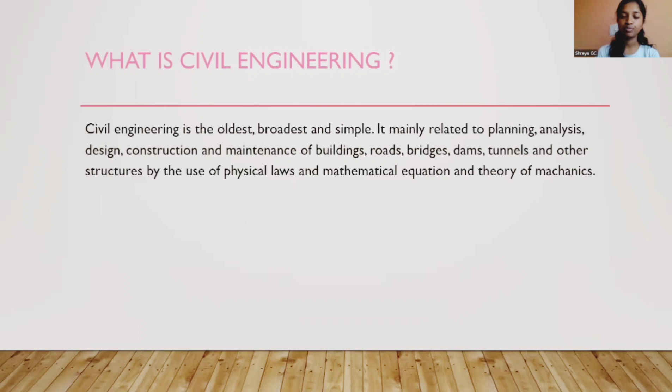Now we'll discuss the scope of civil engineering. It contains 9 elements: surveying, structural engineering, geotechnical engineering, hydraulics and water resource, transport engineering, environmental engineering, construction planning and project management, earthquake engineering, and remote sensing and GIS.

So firstly, what is surveying? It is a science or art of map making. It mainly deals with various types of measurements and plotting of maps. Unless maps are drawn, no development work or construction can be undertaken. Earlier, traditional instruments used for surveying were chain, tape, leveling instruments, etc. Modern instruments are distance meter, total station, theodolite, etc.

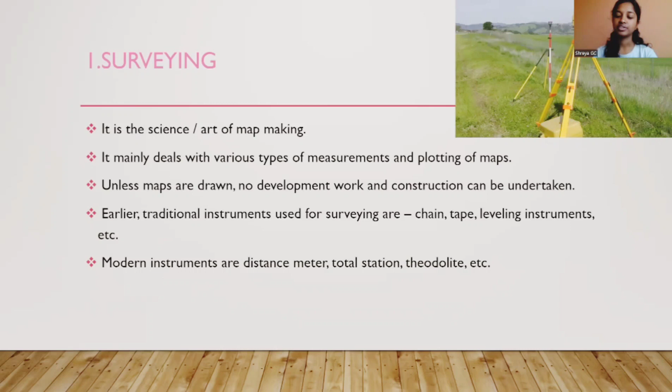The second scope of civil engineering is structural engineering. It mainly deals with analysis and design of various structures like steel structures, trusses in industrial buildings, towers, etc., and concrete structures like buildings, bridges, dams, etc.

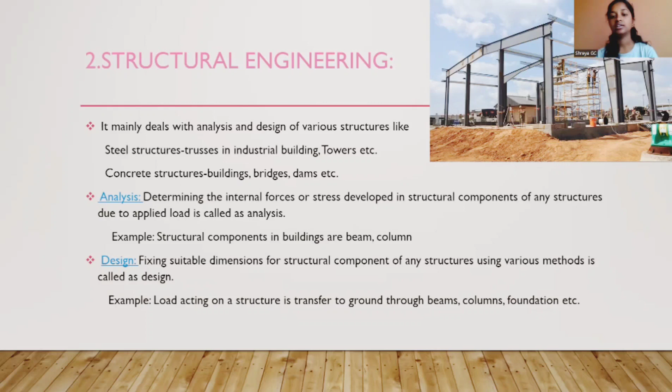Analysis is determining the internal force or stress developed in structural components of any structure due to applied load. Example: structural components in a building are beam and column. Design is fixing suitable dimensions for structural components of any structure using various methods. Example: load acting on a structure is transferred to ground through beam, column, foundation, etc. Later, I will discuss about beam, foundation, and column.

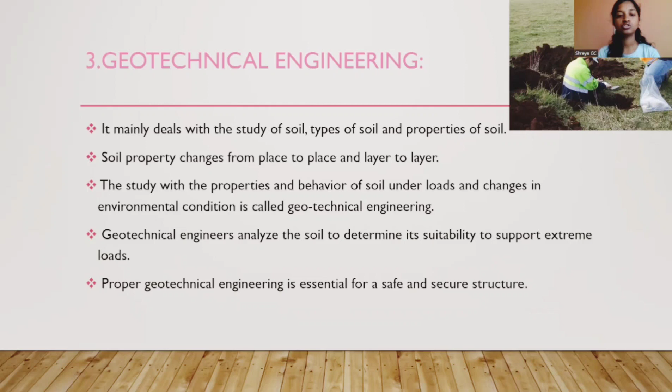The next one is geotechnical engineering. It mainly deals with the study of soil, types of soil, and properties of soil. Soil property changes from place to place, layer to layer. The study of properties and behavior of soil under loads or changes in environmental conditions is called geotechnical engineering. Geotechnical engineers analyze the soil to determine its suitability to support extreme loads. Proper geotechnical engineering is essential for a safe and secure structure.

The fourth scope of civil engineering is hydraulics and water resource. Hydraulics: as we know, water is a very important need for all human beings. It mainly deals with the study of mechanics of water and its characteristics like pipe flow, open channel flow, dams, irrigation, hydropower, etc.

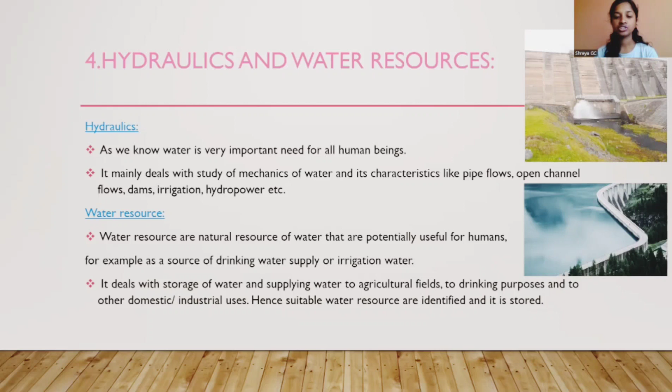Water resource: water resources are natural resources of water that are potentially useful for humans, for example as a source of drinking water supply or irrigation water. It deals with storage of water and supplying water to agricultural fields, for drinking purposes, and for other domestic or industrial uses. Hence, suitable water resources are identified and stored.

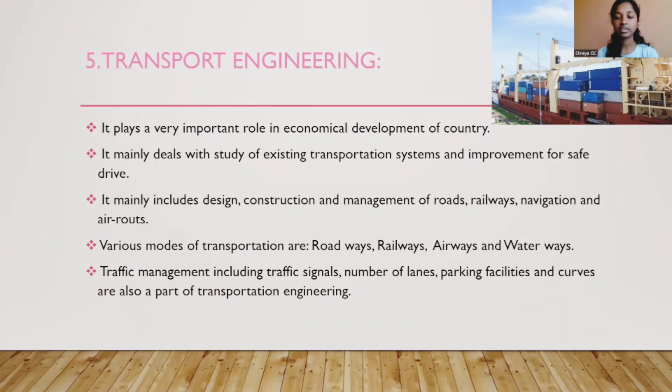The next one is transport engineering. It plays a very important role in the economic development of a country. It mainly relates to the study of the existing transport system and improvements for safe driving. It includes design, construction and management of roads, railways, navigation and air routes. Various modes of transportation are roadways, railways, airways, and waterways. Traffic management, including traffic signals, number of lanes, parking facilities, and curves, are also part of transportation engineering.

The sixth scope of civil engineering is environmental engineering. This is an important branch of civil engineering which covers both water supply and sanitary engineering. The main aim of environmental engineering is to keep the environment clean. It encompasses the treatment of waste originating from different sources. The impact of waste from industry is felt by living organisms if such waste contains toxic substances. The central government as well as state governments have enacted laws for protection of the environment needed for safe living of human beings.

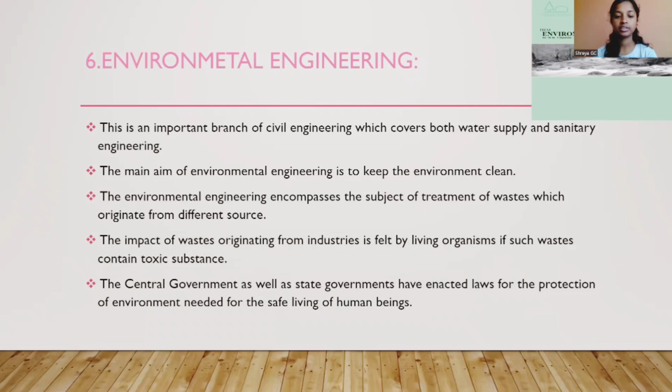The seventh scope of civil engineering is construction planning and project management. Construction planning deals with different types of construction of structures like buildings, roads, bridges, etc., construction of underground tunnels using modern equipment, and construction of floating structures. It mainly includes excavation of soil, construction of foundation, concreting, finishing, etc.

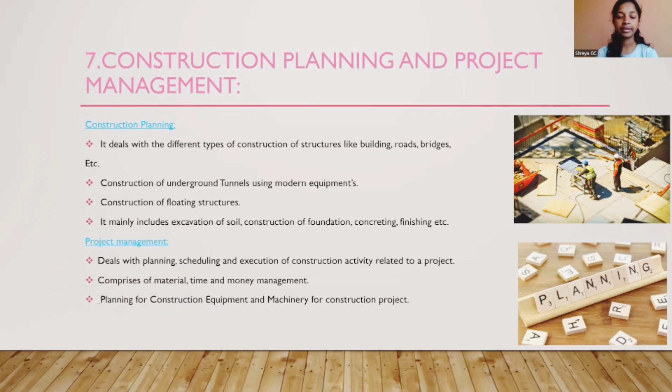Project management deals with planning, scheduling, and execution of construction activity related to a project. It comprises material, time, and money management, and planning for construction equipment and machinery for the construction project.

The eighth scope of civil engineering is earthquake engineering. An earthquake is a sudden and rapid shaking of the ground due to passage of vibration. The study of earthquakes is called seismology. Earthquakes with magnitude of about 2 or less, usually called micro earthquakes, are generally recorded only on local seismographs. Events with magnitude 4.5 or greater are strong enough to be recorded by sensitive seismographs all over the world. Great earthquakes have a magnitude of 8 or higher.

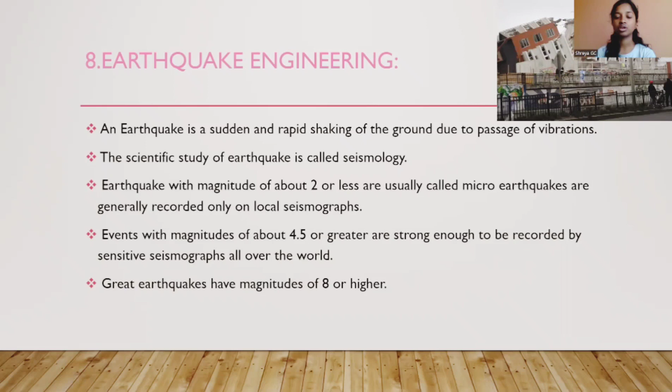The last scope of civil engineering is remote sensing and GIS. GIS and remote sensing techniques have become essential and powerful tools for tackling civil engineering problems. The majority of remote sensing systems use the sun's radiation. Remote sensing is the art and science of gathering information about items, events or areas without physically touching them. It deals with measurement, mapping, monitoring, and modeling of geographic information around us.

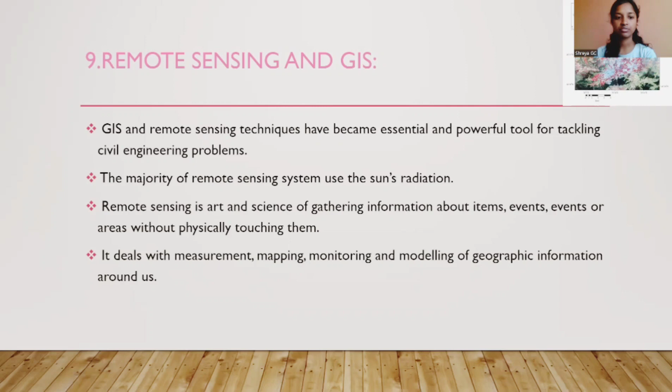Let's discuss the types of materials used in construction. These are bricks, cement, mortars, plain concrete, reinforced and pre-stressed concrete, structural steel, and construction chemicals.

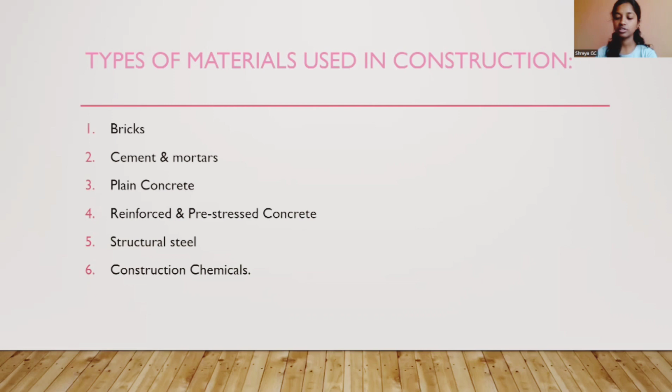So first one is brick. Bricks are obtained by molding clay in rectangular blocks of uniform size and then drying and burning these blocks. As bricks are of uniform size, they can be properly arranged, are light in weight, and hence bricks replace stones.

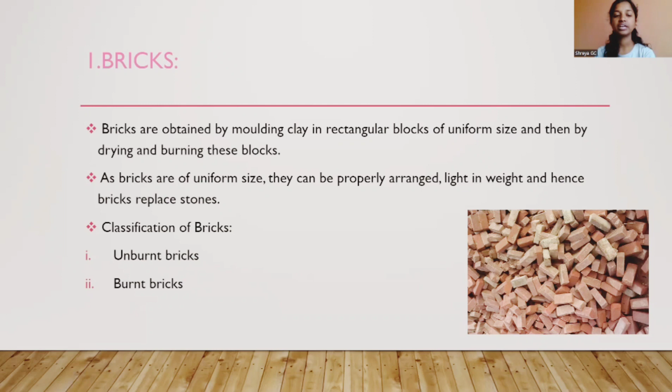Classification of bricks: unburnt bricks and burnt bricks. Unburnt bricks or sun-dried bricks are dried with the help of heat received from the sun after the process of molding. These are used for temporary and cheap structures. Such bricks should not be used at places exposed to heavy rains.

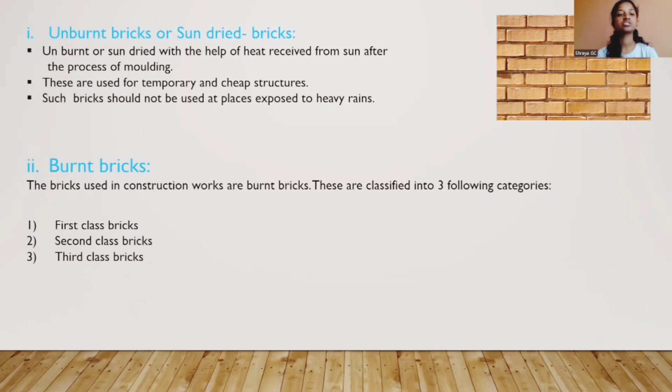The second one is burnt bricks. The bricks used in construction works are burnt bricks. These are classified into three categories: first class bricks, second class bricks, and third class bricks.

First class bricks: uniform red or brownish colored, high crushing strength not less than 10.7 Newton per meter square, machine molded, efflorescence is nil, water absorption is less than 15%. Use of first class bricks: they are used for exterior wall bricks, short columns and arches.

Second class bricks: uniform colored but slightly overburnt, high crushing strength not less than 7 Newton per meter square, hand molding, efflorescence is little, water absorption is less than 20%. Use of second class bricks: they are usually used for internal walls and compound walls.

The last one is third class bricks: overburnt and non-uniform color, high crushing strength not less than 3.5 Newton per meter square, hand molding, efflorescence is more, water absorption is less than 25%. They are used for flooring and paving.

And these are the images of first class, second class, and third class bricks.

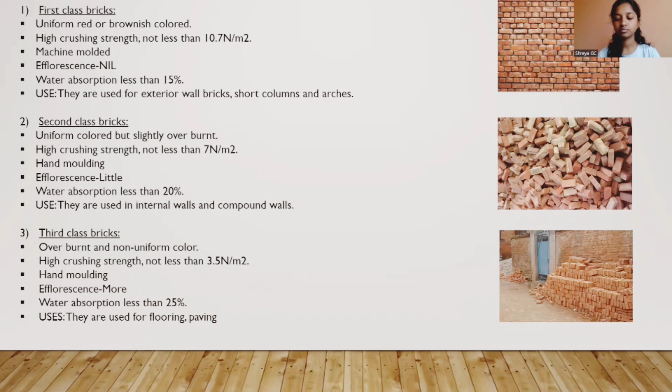Cement. A cement is a binder, a substance used for construction that sets, hardens, and binds materials together. Grades of cement generally indicate the strength of cement. The strength of cement is generally measured as compressive strength.

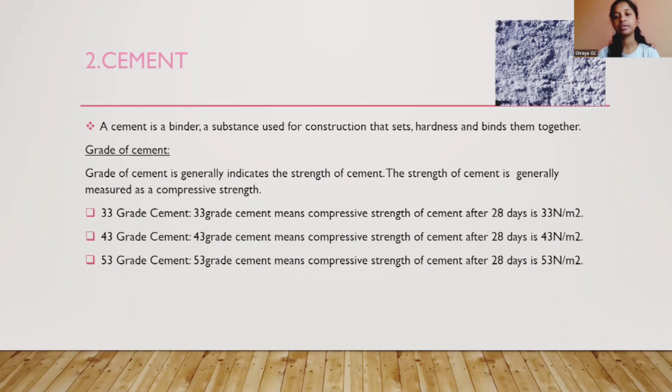There are three types in grades of cement. The first one is 33 grade cement, meaning the compressive strength of cement after 28 days is 33 Newton per meter square. The second one is 43 grade cement, meaning compressive strength after 28 days is 43 Newton per meter square. The third one is 53 grade cement, meaning compressive strength after 28 days is 53 Newton per meter square.

Types of cement: there are mainly three types. The first one is ordinary Portland cement, also known as OPC, which is manufactured and used worldwide. OPC cements are available in three grades such as 33, 43, and 53.

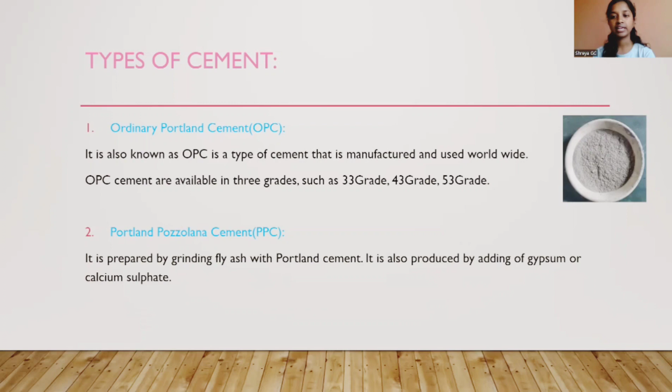The second type of cement is Portland Pozzolana cement. It is prepared by grinding fly ash with Portland cement. It is also produced by adding gypsum or calcium sulfate. It is a uniformly blended mixture of Portland cement and fine pozzolana.

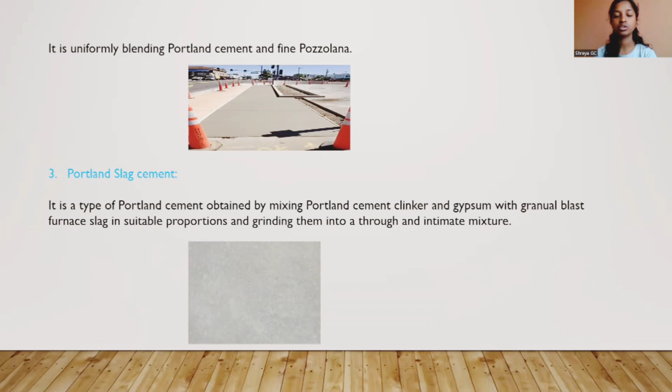The third type of cement is Portland slag cement. It is a type of Portland cement obtained by mixing Portland cement clinker and gypsum with granulated blast furnace slag in suitable proportions and grinding them into a thorough and intimate mixture.

The third one is mortar. Mortar is a mixture of cement, sand, and water. Uses of mortar: it is used in between joints of bricks during construction of walls, used for repair of cracks, and used for molding to form joints of pipes.

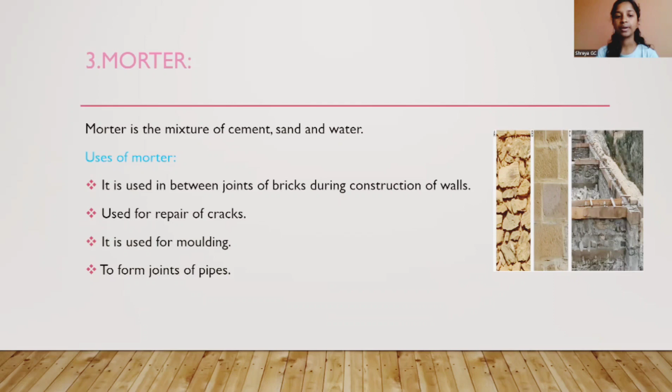The fourth one is concrete. Concrete is obtained by mixing cement, fine aggregate (sand), coarse aggregate (crushed stone), and water in definite proportions.

Types of cement concrete: plain cement concrete. Plain cement concrete is a construction material composed of cement, fine aggregate, and coarse aggregate mixed with water, which hardens with time. These are the types of plain cement concrete.

Normal strength concrete is obtained by mixing ingredients - cement, water, and aggregate - which will give normal strength concrete. Normal strength concrete has an initial setting time of 30 to 90 minutes, which depends on the properties and weather conditions of the construction site.

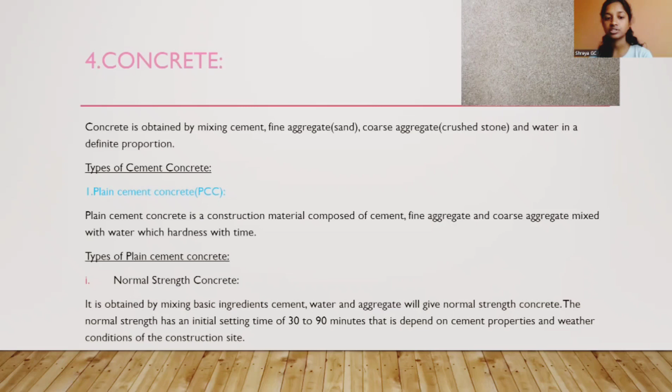Lightweight concrete: concrete that has density less than 1920 kg per meter cube is categorized as lightweight concrete. It is applicable for protection of steel structures and is also used for construction of long span bridges, and for construction of building blocks.

High density concrete: concrete that has high density ranging between 3000 to 4000 kg per meter cube is called high density concrete. Crushed rocks are used as coarse aggregate. These are used in construction of atomic power plants and similar projects.

Air entrained concrete: in this, air is entrained for an amount of 3 to 6% of concrete. Some examples of air entraining agents are resins, alcohols, and fatty acids.

High strength concrete: these have strength greater than 40 MPa and can be termed high strength concrete. This increase in strength is achieved by decreasing the water cement ratio to even lower than 0.35.

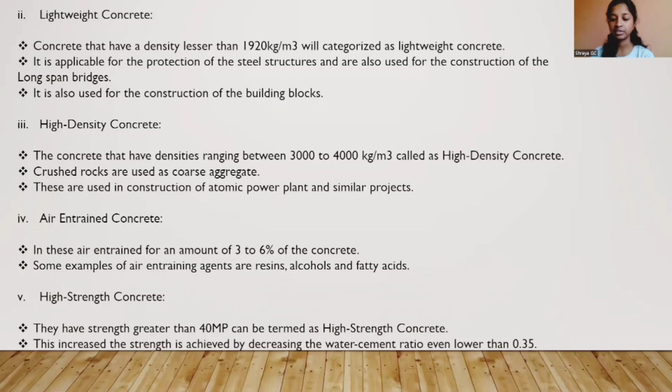And the last type is high performance concrete. These concretes conform to a particular standard but in no case will be limited to strength.

It has to be noticed that all high strength concrete can be high performance type, but not all high performance concrete are high strength concrete. Reinforced cement concrete has very high compressive strength but low tensile strength. It has least chances of buckling and rusting. It is used for construction on a large scale, such as bridges, dams, tall buildings, and for paving in airports, roads, and high traffic areas.

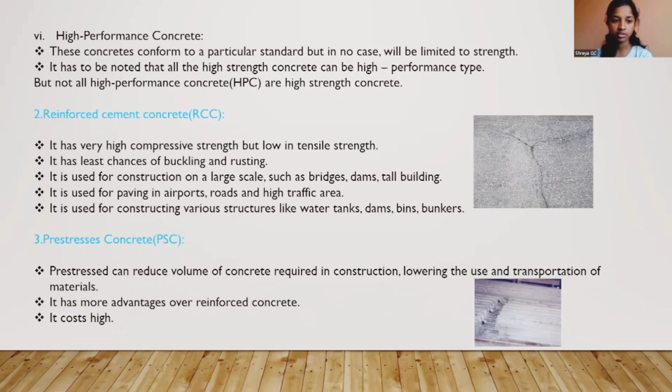It is used for constructing various structures like water tanks, dams, bins, bunkers. Prestressed concrete can reduce the volume of concrete required in construction, lowering the use and transportation of material. It has more advantages over reinforced concrete but costs high. The fifth material used for construction is steel.

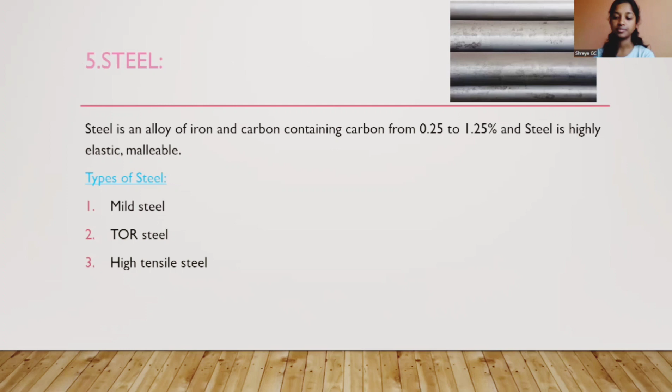Steel is an alloy of iron and carbon, containing carbon from 0.25 to 1.25%, and steel is highly elastic and malleable. Types of steel: mild steel, TOR steel, high tensile steel. Firstly, mild steel is a plain carbon steel where less than 0.25% of alloy is present. It is low priced. The second type is TOR steel.

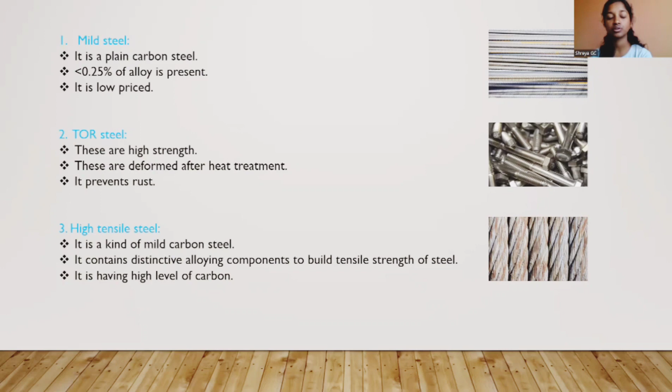TOR steel has high strength. They are deformed after heat treatment, and it prevents rust. The third one is high tensile steel, a kind of mild carbon steel. It contains distinctive alloying components to build the tensile strength of steel. It has a high level of carbon.

The last one is construction chemicals. Firstly, adhesives have rich bonding property apart from weatherproof and waterproof qualities. They are widely used in all types of construction works, which include tile fixing and floor covering, sealants and caulks. They are used to block an opening surface or small crack to prevent liquid or moisture leakage that damages the construction.

Epoxy grouts are used for grouting, have high durability property, and are applied in extremely high temperatures. Admixtures are used to modify the flow characteristics, strength, and durability of concrete.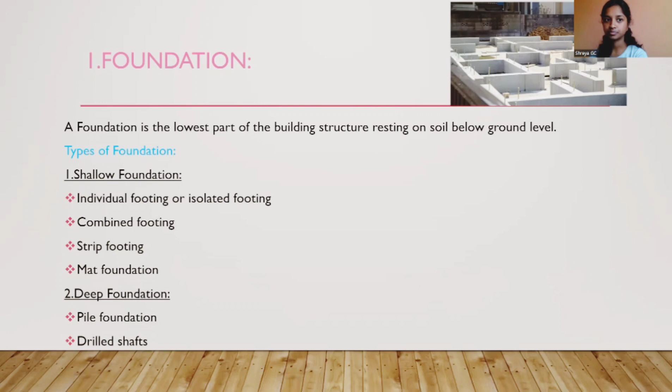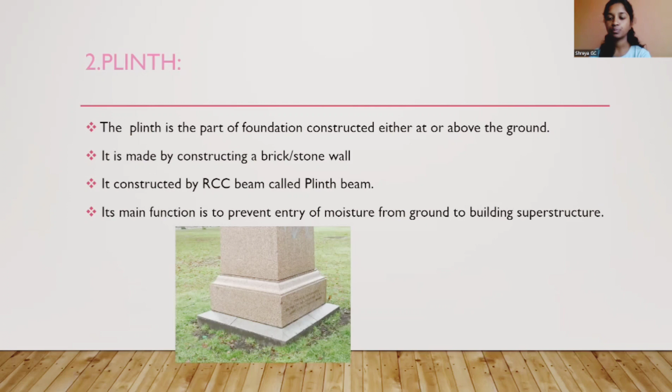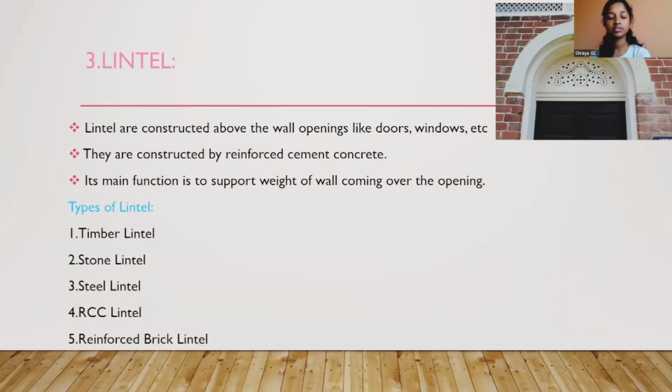Lintel. Lintels are constructed above wall openings like doors, windows, etc. They are constructed by reinforced cement concrete. Its main function is to support the weight of the wall coming over the opening. Types of lintel: timber lintel, stone lintel, steel lintel, RCC lintel, reinforced brick lintel.

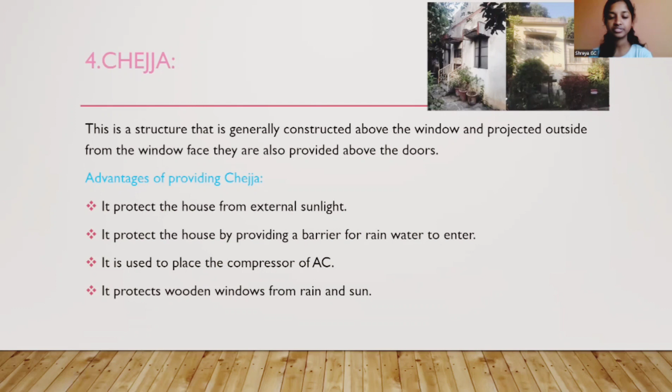The fourth one is Chejja. This is a structure generally constructed above the window and projected outside from the window face. They are also provided above doors. Advantages of providing Chejja: it protects the house from external sunlight, it protects the house by providing a barrier for rain water to enter, it is used to place the compressor of AC, and it protects wooden windows from rain and sun.

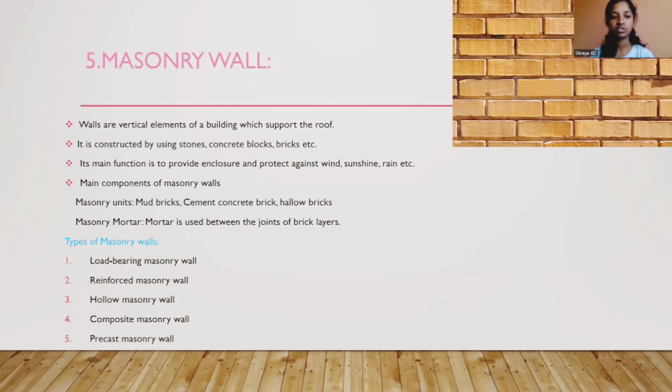Masonry units contain mud bricks, cement concrete bricks, hollow bricks, and masonry mortar is used between the joints of brick layers. Types of masonry walls: load-bearing masonry walls, reinforced masonry wall, hollow masonry wall, composite masonry wall, precast masonry wall. The sixth one is columns.

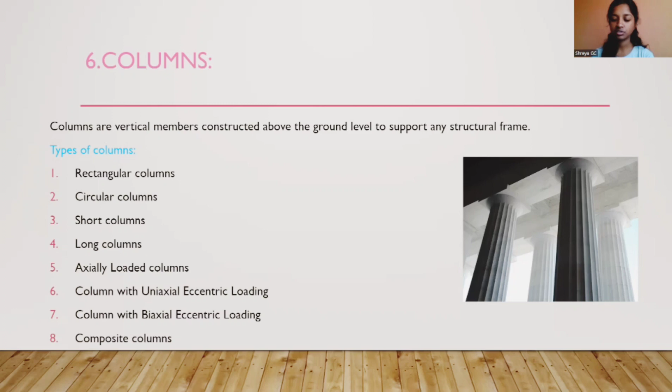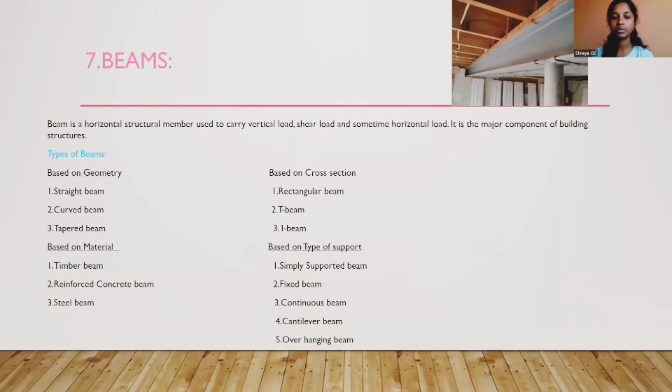Based on cross section: rectangular beam, T beam, and I beam. Based on type of support, there are five types of beam: simply supported beam, fixed beam, continuous beam, cantilever beam, overhanging beam. The eighth one is slabs.

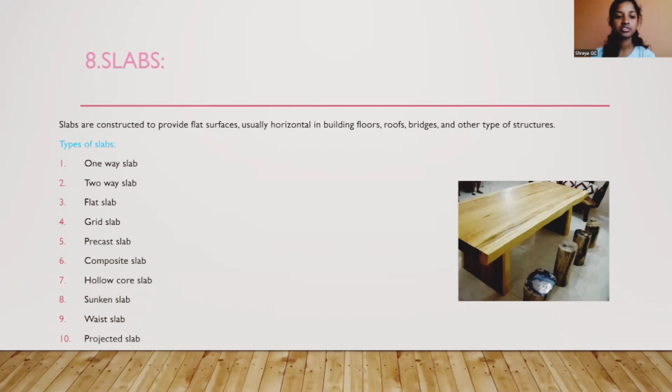Slabs are constructed to provide a flat surface, usually horizontal, in building floors, roofs, bridges, and other types of structures. Types of slabs: one-way slab, two-way slab, flat slab, grid slab, precast slab, composite slab, hollow core slab, sunken slab, waist slab, and projected slab. The last one is staircase.

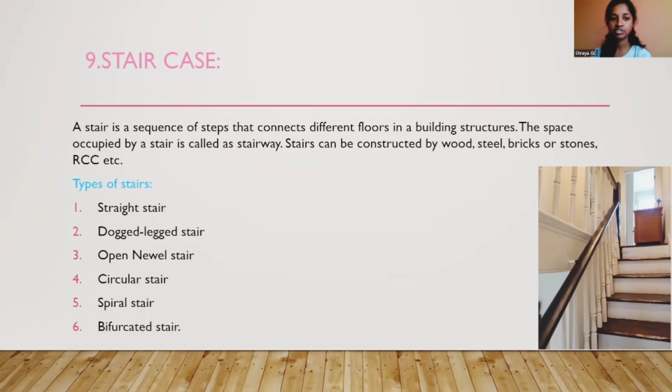A staircase is a sequence of steps that connects different floors in a building structure. The space occupied by the stair is called a stairway. Stairs can be constructed by wood, steel, bricks or stones, RCC, etc. Types of stairs: straight stair, dog-legged stair, open newel stair, circular stair, spiral stair, bifurcated stair.